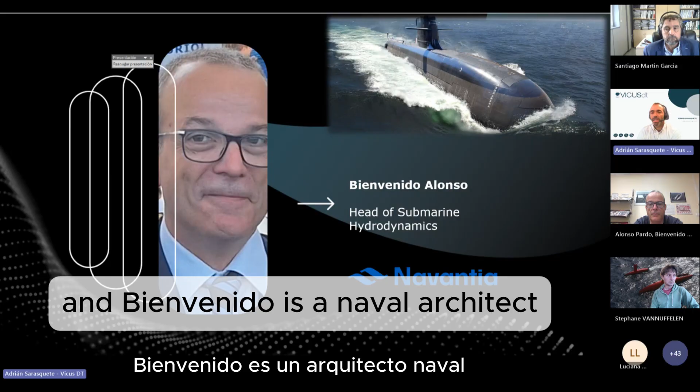So we welcome Bienvenido Alonso. He's the head of submarine hydrodynamics at Navantia. Navantia, as many of you know, is one of the leading Navy shipyards in Europe, and Bienvenido is a naval architect. He has been working on submarine hydrodynamics for 2 decades, and we are very happy that he can share some insights into the hydrodynamics of quiet submarine design today.

Then Santiago Martín is the managing director of the biggest shipyard of Armón Group, which is the biggest shipbuilding group in Spain. Santiago has accumulated several decades of experience working on silent propeller projects in their oceanographic research vessels, which are among the quietest in the world. So he will bring the shipbuilder's perspective on how to bring the scientific concepts of quiet propulsion to the slipway. Good morning, everybody.

Welcome, Santiago. And then Stéphane Vannuffelen is from EXAIL, which is one of the leading companies in unmanned vehicle design and construction for different roles. Stéphane holds an engineering degree in physics and has more than 20 years of experience in the fields of offshore and research for underwater noise, and he will also explain his experience with the EXAIL unmanned vehicles and some practical cases.

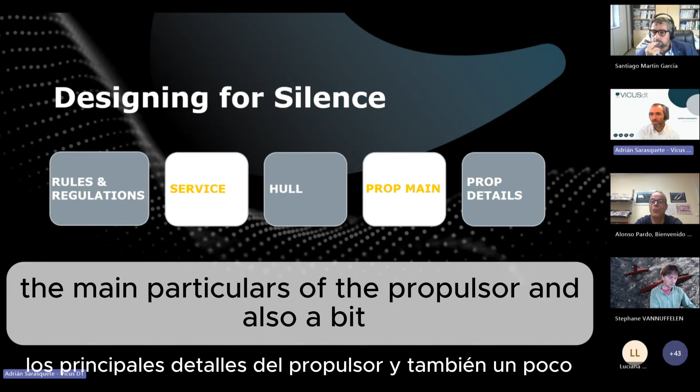Okay, that's me. Some of you already know me. I'm the managing director of VICUSdt, a ship propulsion consultancy specialized in ship propulsion and engineering. So in the first part, as I said, I will give a brief introduction on certain interesting topics, which are not purely propeller hydrodynamics, but more the connection with practical aspects of shipbuilding. There will be 5 blocks in these 15 minutes: the rules and regulations, the service and mission of the vessel and its constraints, the impact of the hull design and how it influences the propeller, the main particulars of the propulsor, and also a bit of insight into the propeller details.

We were joking yesterday that we might spend 1 hour talking about only one of these slides, because you can spend the whole day talking about the standards, or 2 weeks talking about the service conditions or hull optimization. But the idea of this block is just to give a very brief overview of several topics that will help us during the roundtable.

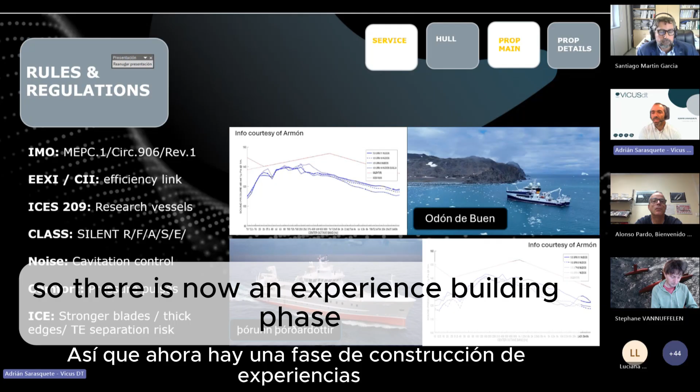Okay, so regarding the rules and regulations, just some brief notes. People are a bit scared about the upcoming IMO MEPC guidelines that were recently approved. There are some guidelines for underwater radiated noise. There is now an experience-building phase from 2024 to 2026, and maybe some mandatory limits will come after that. So we will see where this takes us. But this is a kind of warning for the market that things are also moving at the IMO level. So it's not only Navy and research vessels, but also what can become mandatory for other types of ships.

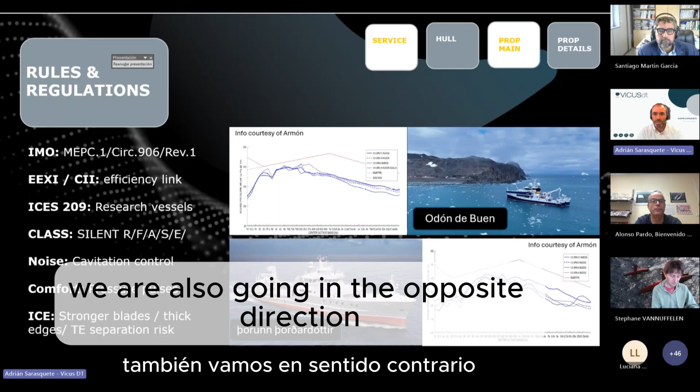The EEXI and the CII are all in place and under control, but they're also linked. According to IMO, there might be a link between them, because more efficient vessels should be quieter since they use less energy to propel through the water. But on the other hand, when we push the propeller design for efficiency, we are also going in the opposite direction compared to silent design, as we will see a bit later.

Then the ICES 209, some of you will be familiar with it, and also the class rules, the class notations for silent vessels. We talk about the underwater noise curves, like we can see here. Thanks to Armón, we have these 2 pictures of these nice ships built in Vigo, Armón shipyard, and also the curve you see there is the ICES 209 limit, which is the red curves, and below you can see the noise signature of those vessels. That is the blue curves, which have been recorded with the sonobuoys.

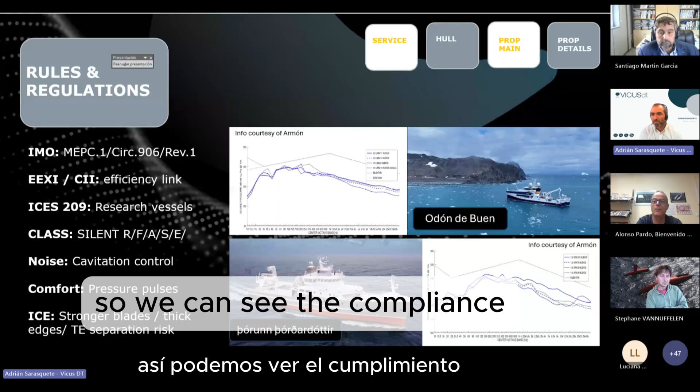So we can see the compliance, which is very important for this type of vessels, so they can accomplish this mission. So you have 2 ways of complying with the curves, either the ICES 209 or class rules, like the Silent notation by DNV or Dolphin by RINA or others.

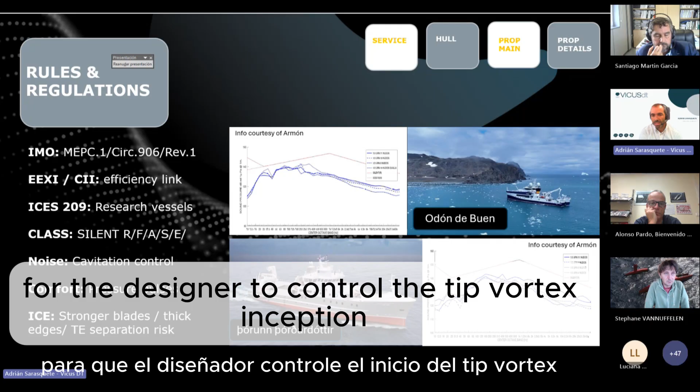Then when we talk about the underwater noise, we mostly are talking about cavitation control. So sheet cavitation, but mostly it's tip vortex what we have to control. We have to delay the tip vortex inception. And this is what we have to keep in mind when we are talking about compliance with one of these underwater rules. So very focused, for the designer, on controlling the tip vortex inception.

And then the comfort standards are somehow connected to the quiet propellers, because the pressure pulses transmitted by the propeller are also an important driver for the vibrations and noise on board. And so there is also a connection there. When a ship has to comply with the comfort standard, in the end, you have to make a silent propeller.

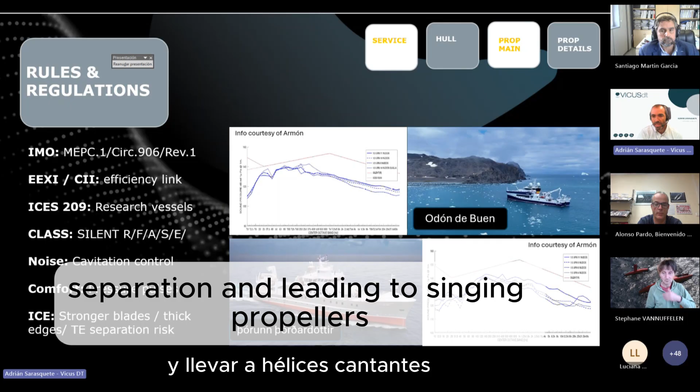And last but not least is the ice class. The ice class is affecting the thickness of the blades, and this might have an impact on trailing edge flow separation and lead to singing propellers. So we will talk a bit about that later.

Okay, next one is the service conditions. The shipyard is paid to design a vessel and build it to comply with some requirements, but the owner is sometimes requesting things which are very challenging. So they want efficiency, but they want hydroacoustic performance, and this takes us to a difficult compromise. So making a quiet propeller compared to a very efficient propeller is not always possible.

So making it quiet, complying with any of the standards we mentioned earlier, implies very often losing easily 5 to 10% efficiency, depending very much on the project. But in a challenging project, the efficiency loss can be significant, and this must be kept in mind.

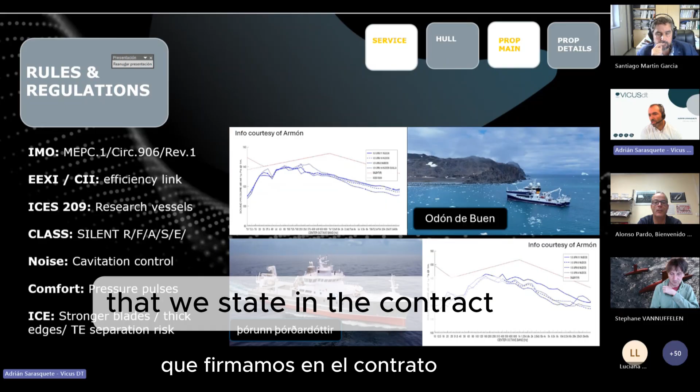When we talk about the silent speed that we state in the contract, it's important how far it is from the top speed, because we cannot make a small hull with a silent speed of 11 knots when the top speed is 12 knots. And this is because of the Froude number that you all know. This will lead to a very highly loaded propeller thrust coefficient. And this also makes the design of the propeller much more difficult.

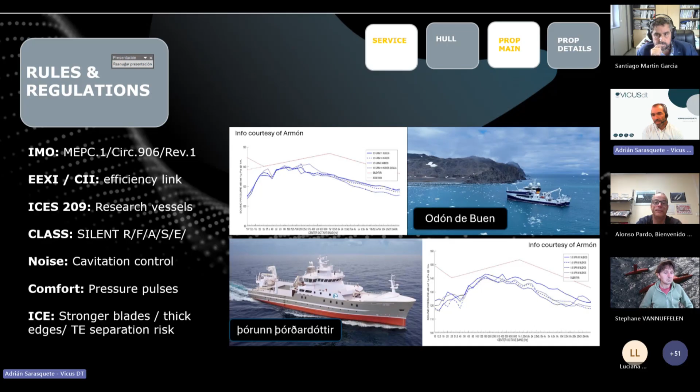So typically, small ships have a compliant silent speed in the low range, say 8, 9 knots, while bigger ships are more in the range of 10, 11 knots for the noise measurements. And when it comes to the maximum speed, it impacts the design of the propeller as well, because when my contract states that I have to comply with a top speed which is very much on the edge of the hull design, I need to squeeze my propeller to be efficient also to reach the top speed in the contract conditions. Sorry, the slide was wrong.

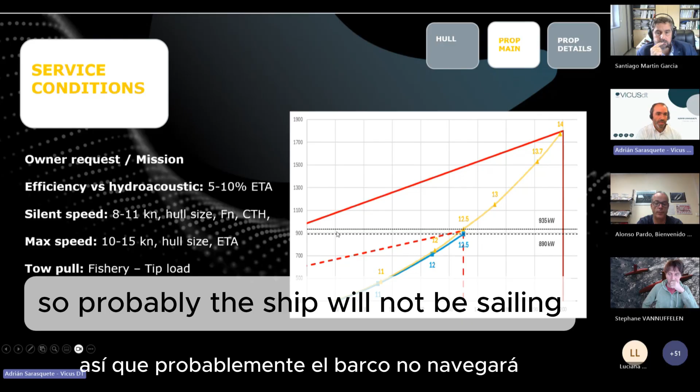This is an example, a ship designed for 12.5 knots and a ship designed for 14 knots. So probably the ship will not be sailing much faster than 12.5 or a bit more. But the difference in the efficiency of the propeller, you can see here, we have 45 kilowatts. So it's 5% efficiency, because one propeller was designed for 14 knots, while the other was designed for an engine only to reach 12.5.

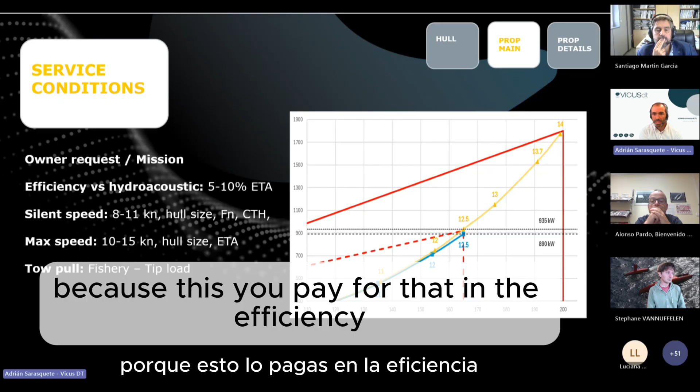So if the ship really doesn't need this extra knot, it will have a cost to keep it for the rest of the life of the ship. So it's very important. This is more a talk to the owners, not to ask for very high speeds, because you pay for that in the efficiency and also in the silent design of the propeller.

Okay, and then for the tow pull, especially for the fishery research vessels, there is also a requirement in the tow pull by towing a net or typical research net. And this also has an impact on the tip load, especially if it's a ducted propeller. So take care also with that.

Okay, going into the hull, then Santiago will talk a bit more about this, so I will go about this quick. It's obvious the resistance is not a secondary factor, but is critical, because if I lower the resistance, I reduce the thrust needed by the propeller and it makes the life of the propeller designer much easier.

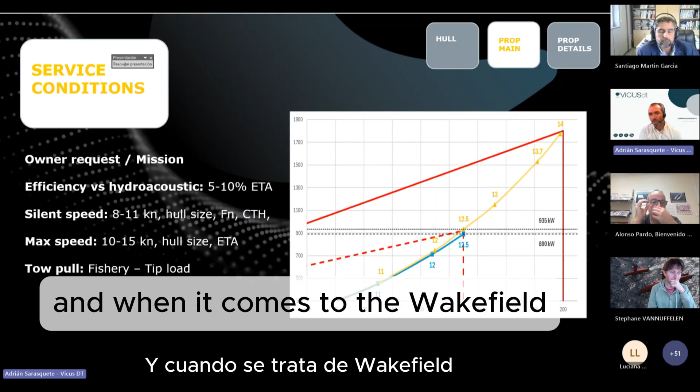Thrust deduction and wake. And when it comes to the wake field, it's obvious that going from single to twin screw also makes the life much easier for the propeller designer, and we can make a more efficient and quiet propeller. But obviously the twin screw configuration is not the cheapest. But if the project allows, or for a challenging project, when you go twin screw, it is much easier to comply with all the requirements.

Adrián, excuse me, I believe you are having problems with the slides. Yeah, sorry. Okay. Here it is.

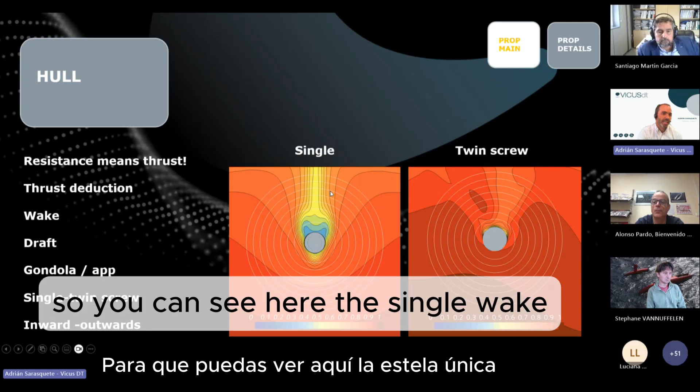Yeah, the single and the twin screw I was showing. So you can see here the single screw wake field and the twin screw wake field, where you can see here the shadows of the shaft brackets and the shadow of the shaft still having an impact, but it is way less than when you see the single screw. So this is the impact the wake has in your project.

And the same happens with the rotation of the shaft. When you go with a twin screw, ideally you should go for a rotation inwards. That's the way. So the propellers are rotating inside, so you unload the propeller. That's an easy decision and also has an impact on the load of the propeller and the cavitation performance.

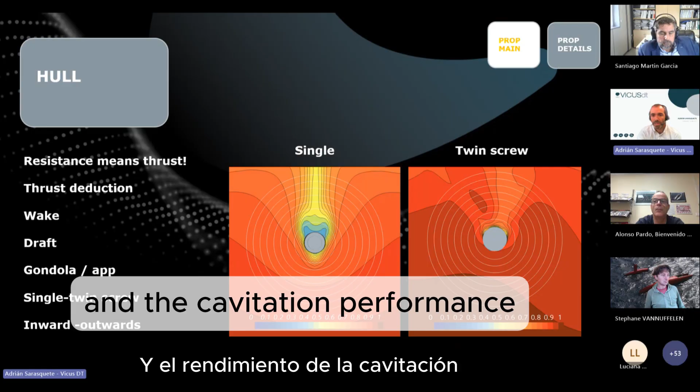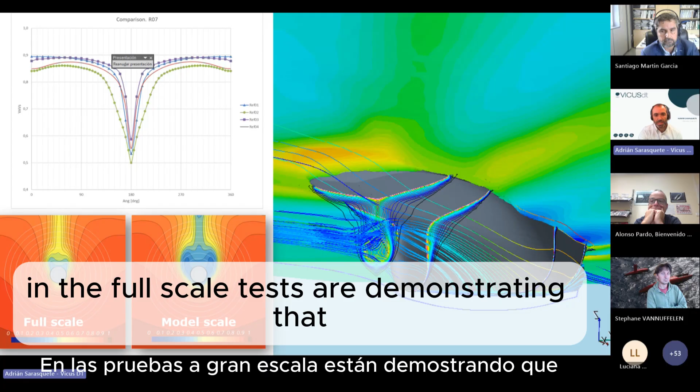Okay, just the two last ones, on the main particulars of the propeller. So now we talk about real propellers. The first decision: once you have your hull, you optimize your wake field, you optimize your appendages, the gondolas and everything. You convince the owner not to ask for a lot of thrust, a lot of speed. It's time to go for the propeller.

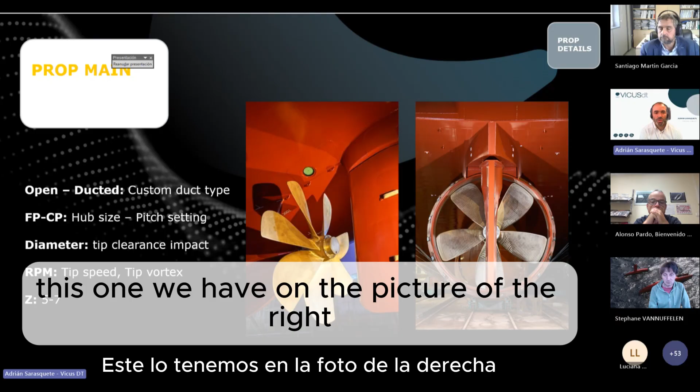And most of the configurations are open propellers for quiet ships, research vessels mainly. But there are some cases of ducted propellers, like this one we have in the picture on the right, which is an ice class ducted propeller, also compliant with the underwater noise requirements.

When you do put a nozzle, make sure you make a custom nozzle. So not the standard 37 or 19A. The standard nowadays is to make custom nozzles, typically shorter nozzles with custom profiles. The construction cost is almost the same, and the interaction with the propeller tip is much better. So this is a good step to consider.

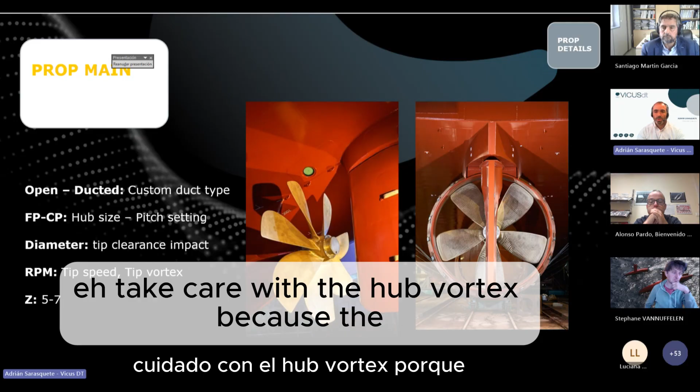For the fixed or controllable pitch, fixed pitch is the standard. And if you go for controllable pitch, which gives you also a lot of flexibility, despite it's much more expensive and not so optimal, take care with the hub vortex, because you might end up having a very strong hub vortex. And I think later on Bienvenido will mention that, because that's also another problem with the submarine vessels. When you unload the tip, the load goes to the hub. So in the CP propellers, that is more critical.

And regarding the RPM, the tip speed is the parameter to control, which typically should be between 17 and 22 meters per second at silent speed. And at top speed, you can find yourself at 25 to 28 meters per second. So you can keep these figures in mind when you are making some numbers for your project.

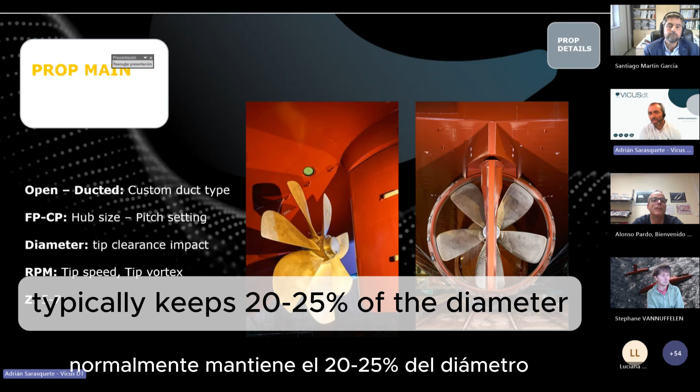And going over the tip clearance, the tip clearance is something that people typically keep at 20-25% of the diameter, but you can really go to lower figures, even 15. So it shouldn't be a problem as far as you control the tip load. So the tip clearance is not a fixed value, it depends a lot on the load on your propeller. So maybe it's better to have a larger propeller with an unloaded tip, even if you are closer to the hull. So keep that in mind as well.

And regarding the blades, 5 to 7 blades is the standard. No need to put more blades.

Okay, and then final slide, and then we go to the chat.

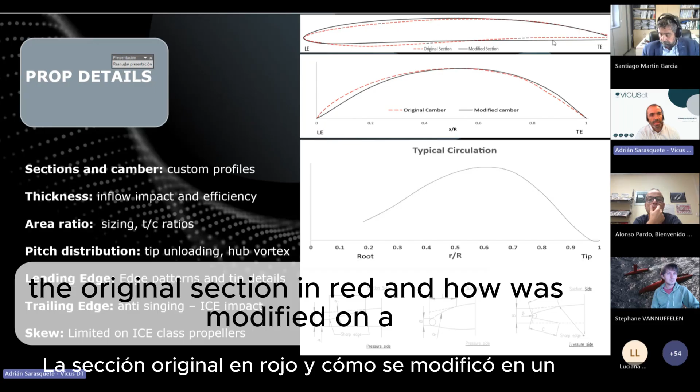Regarding the sections and camber, we can see here on the top of the slide this profile, the original section in red, and how it was modified on a silent propeller. Then the modified section, you can see the change in the sections and in the camber. Below, we can see how the camber is modified: original camber, more camber on the leading edge, and then we go to less camber in that area.

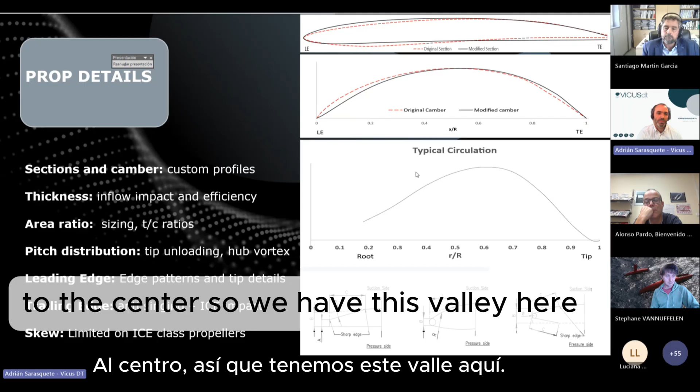So when you talk about the circulation, for those of you that don't know, the circulation is how we distribute the load radially on the propeller. This is the circulation distribution for a silent propeller. We want to shift the load from the tip, here on the right of this curve, to the center. So we have this belly here, but not put too much load on the root, because then I will make a very strong hub vortex.

So it's a trade-off. Try to go to 0 on the tip, increase the load in the middle, but not too much. So in this area you need to find a balance, a trade-off between the load you put there, but not overload the profiles too much.

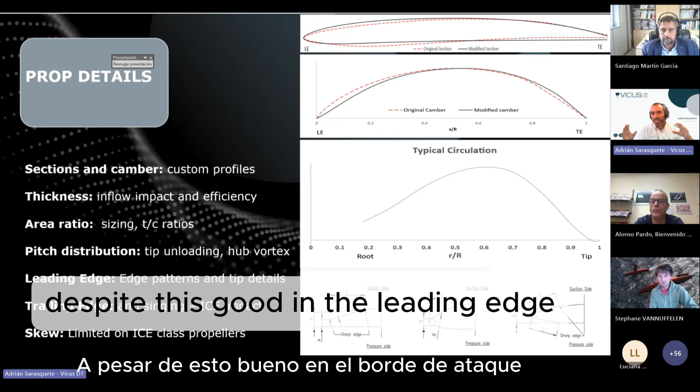And final comment is regarding the trailing edge. You remember I mentioned the ice class propeller. For the ice class propeller, you have to make thicker edges in the leading and the trailing edge. Those thicker edges, despite being good in the leading edge, in the trailing edge can be a problem because of the flow separation there, which can generate singing.

So the anti-singing edges on ice class propellers are very critical, and you have to study that part very carefully, because having a thick trailing edge can generate flow separation very easily, especially with unloaded tips. So that area, the tip with an ice class propeller, is very dangerous.

So pay attention to that when you design your propeller, because for the anti-singing edge there are different options that many of you are familiar with, like suction side only, rounded, both sides, and combinations of them. There's a lot of science behind this, and it's very tricky to tune.

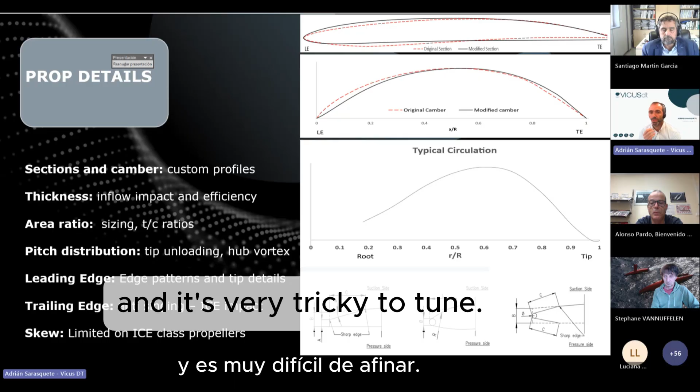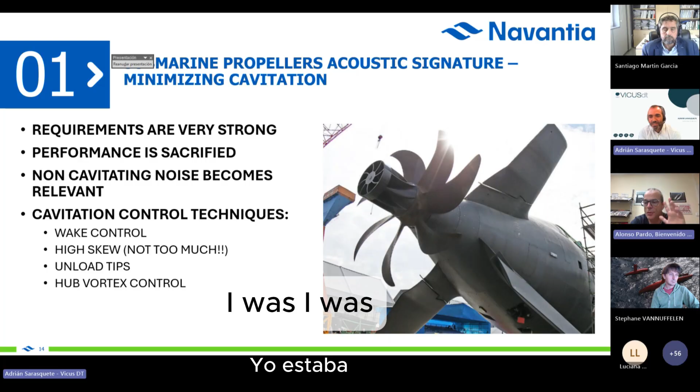Okay, so I think that's all from my side. I already exceeded the time a bit, and now it's time to go to the round table. We have a few slides that were prepared by our friends joining us on the round table. So now I will give the floor to Bienvenido, because I have some questions. Bienvenido, hello, welcome. Hello, everybody. Okay. Well, I will show you.

I want to ask you about the technologies and the state of the art in submarine propulsion design, and what technologies you think are most promising today to minimize cavitation in modern submarines? Okay. As you can imagine, the design of propellers in submarines is a very complicated thing,

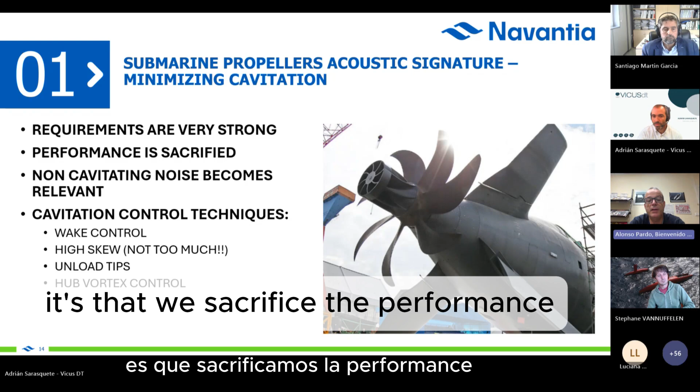because we have highly demanding requirements, acoustic signature requirements, and the usual thing with propellers in submarines is that we sacrifice the performance, trying to meet the requirements on acoustic signature. Usually in submarine propellers the cavitating noise is not very important, because what we have to do to avoid cavitation is go deeper.

Obviously, then the non-cavitating noise becomes relevant in this kind of propeller. But when we go to snorkel depth, at periscope depth, we are at depths usually found with surface ships. Then we have cavitation, and we have to design the propeller attending to several cavitation control techniques.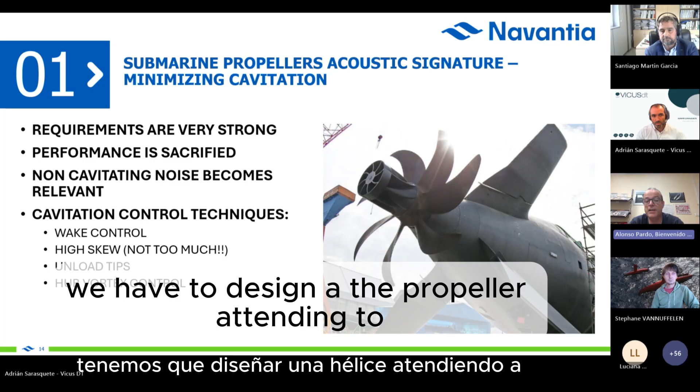Among the main control techniques, in my experience and the experience of everybody in this business, you need to have very strict wake control. Non-uniformities in the wake are the main cause of cavitation.

Then, after controlling the wake, if you have to mitigate the effects of cavitation, you can use high skew, not too much, because highly skewed propellers have additional problems for submarines. But you need to make a high skew propeller to try to mitigate the cavitation.

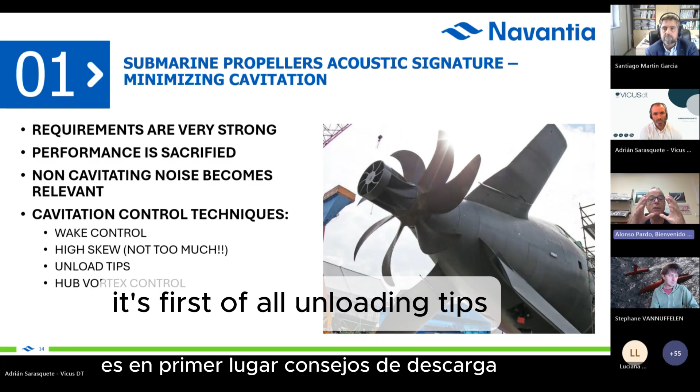And of the two main techniques to control cavitation, first of all is unloading tips. It's the main topic you have to keep in mind when you need to avoid cavitation. It means you sacrifice the performance, you sacrifice the efficiency, unloading tips, but it's the first step to avoid cavitation after wake control, you remember.

Then when you unload tips, you avoid the tip vortex cavitation, and the inception of cavitation should be by hub vortex cavitation. Then you have to,

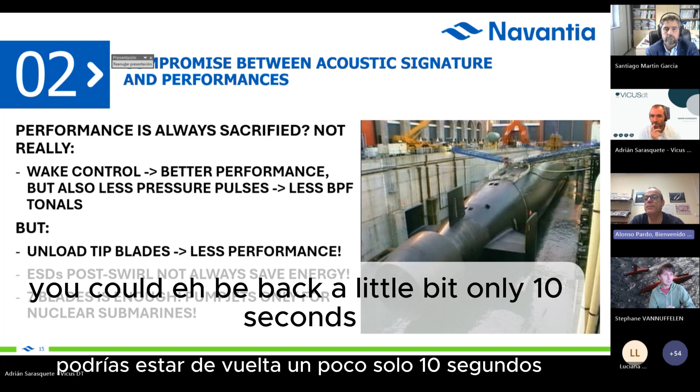Could you go back a little bit, only 10 seconds.

To control the hub vortex cavitation, that is the main problem now. If you have made the things correctly, you need to put something in the hub, like you can see in the photograph. It's not an ESD, an energy-saving device. It's a special thing to try to distort the vortex

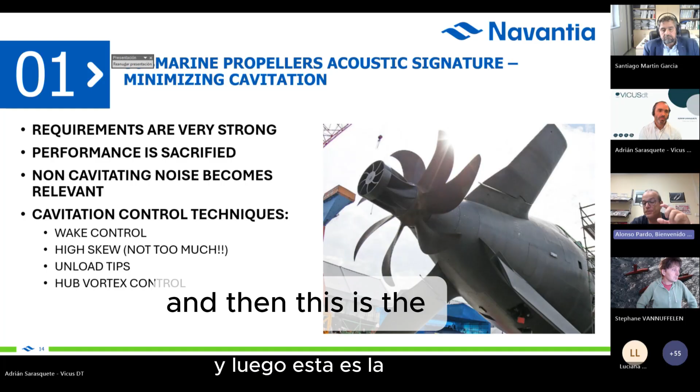produced by the roots of the blades, and try to mitigate the tendency to join the vortex of the roots in the hub. And this is the main way to try to mitigate the hub vortex. That is our main concern today.

Okay, that's an interesting device. We don't have that in the ships. We have the PBCFs, but they are working with a different idea in mind. But yeah, this device is not for saving energy. Yeah. This device increases the energy necessary to move the submarine, but a little bit, and reduces cavitation risk.

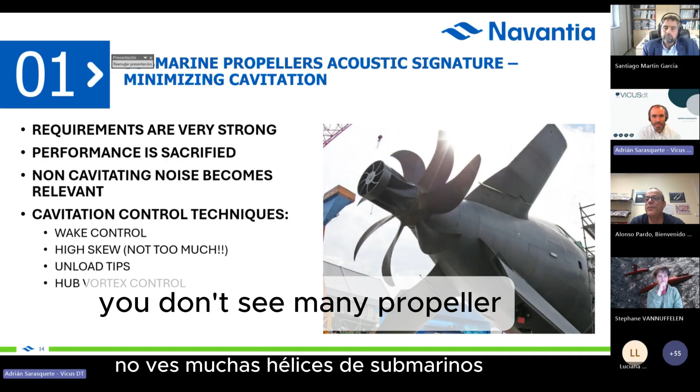Okay, interesting one to see this. You don't see many submarine propeller pictures very often. It's typically very restricted. Yeah, no, this is an internet file from a German submarine, if someone is interested. It's not the Spanish submarine, don't worry.

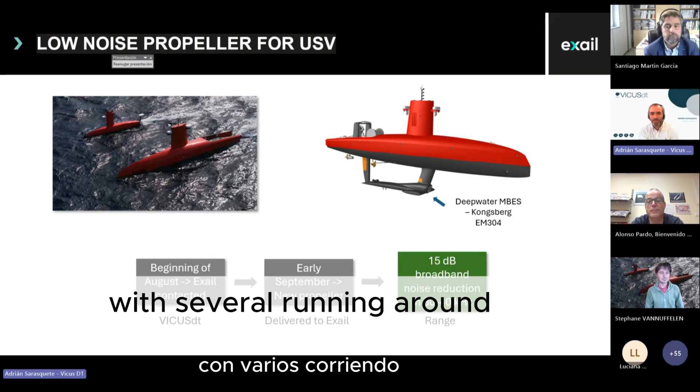Okay, thank you. I also wanted to ask Stéphane, then we will come back to the submarines, to join us and comment a bit on the unmanned surface vehicles, because I think EXAIL has an interesting product now on the market with several running around. Drones are in fashion now because of the extensive use in the world, but I believe there is a promising future now that a lot of companies are developing this type of solutions, and I believe EXAIL has a good one.

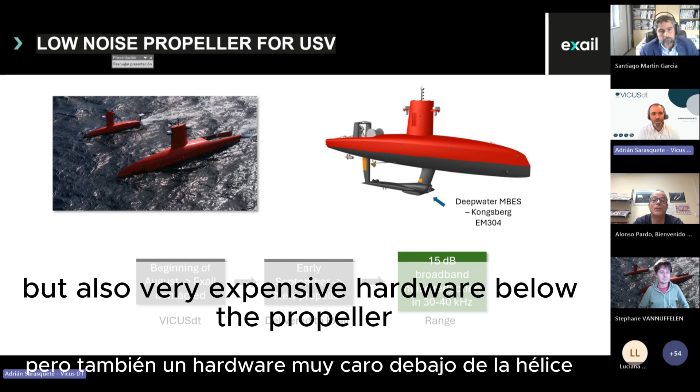So, Stéphane, what are the biggest challenges when integrating a small propeller on a small vehicle with a high power density, where you still need efficiency and you need to be very silent, because you have a big gondola, but also very expensive hardware below the propeller, as we can see in the picture, that is obviously affected by the propeller.

Thanks so much, Adrián, for giving me the opportunity to provide our perspective regarding low noise propellers and the impact of the acoustic signature on USV operations. I work for EXAIL, we're a French company, and we are manufacturing the DriX USV family that you can see on the picture. We have the DriX H8, 8 meters version, and the DriX O16. And in August, we started a collaboration with Adrián and his team regarding optimizing the propeller design for the DriX O16.

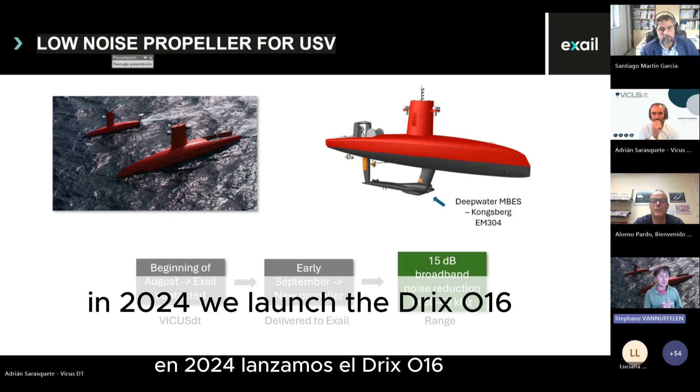These USVs are mostly designed for hydrographic applications, seabed mapping. And in 2024, we launched the DriX O16, that you can see a picture of currently. This DriX O16 is equipped with a full ocean depth multibeam echosounder from Kongsberg, the EM304. This multibeam echosounder is designed to do seabed mapping to water depths in the range of 5,000 to 6,000 meters. It's a fairly big antenna, installed in a gondola below the DriX Ocean. The antenna is in the range of 2 meters wide and 4 meters long.

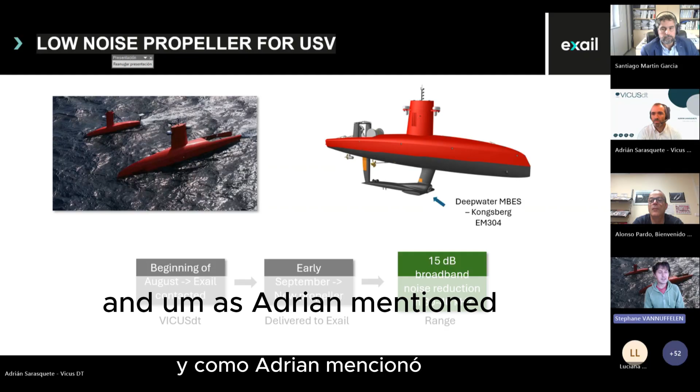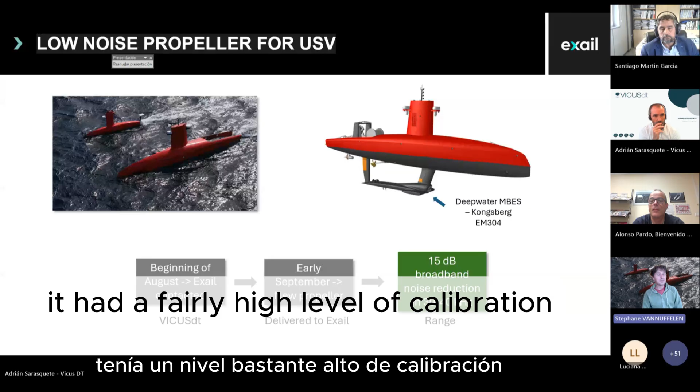And as Adrián mentioned, since it's a multibeam echosounder, the signal-to-noise ratio is super important in terms of maximizing the operating envelope of the multibeam. Any noise received by the receiving part of the echosounder will degrade the performance. So we started the integration of the EM304 in July, and we realized that the three-blade off-the-shelf propeller that we were using at that time was too noisy. It had a fairly high level of cavitation that was impacting the multibeam performance and maximum depth range.

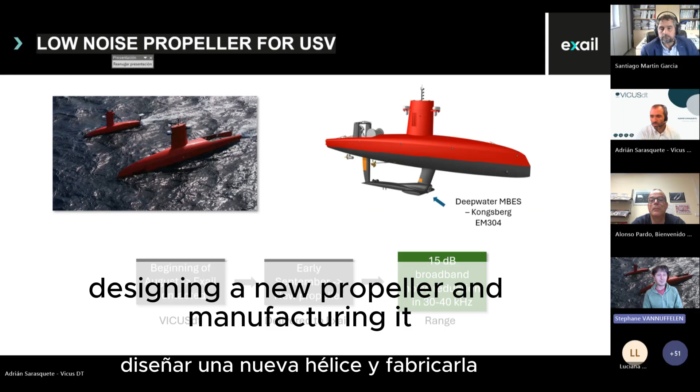So following this, we contacted VICUSdt at the beginning of August to start a study around a new design, knowing that we had a very strict deadline because the vessel was leaving Marseille to go to Lisbon at the beginning of September to participate in REPMUS. So it was a very tight deadline in terms of designing a new propeller and manufacturing it. And in the end, VICUSdt delivered, and it was a very good experience from our standpoint. VICUSdt was really on time in delivering the propeller. It was fitted on the vessel 3 days before its departure.

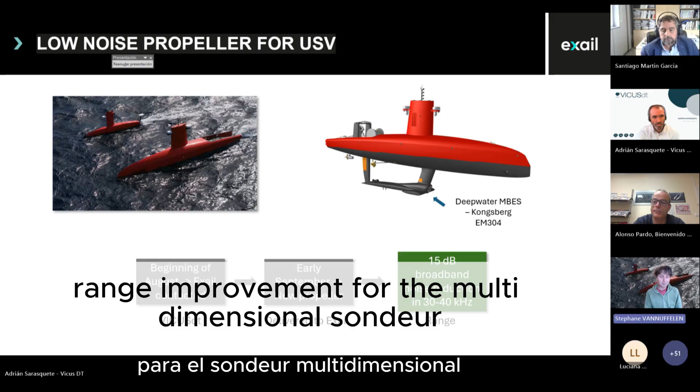So once again, thanks to the entire team at VICUSdt for their dedication. They've really been part of this success, European success, as part of the REPMUS operation.

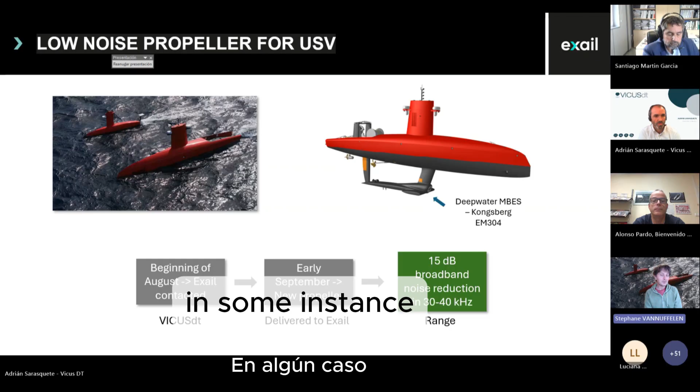In some instances, the DriX Ocean was operating in sea state 5. We had wave heights in the range of 5 to 6 meters while still doing seabed mapping operations. It was the first time a USV demonstrated deep water seabed mapping capability in such a harsh environment.

Thanks so much. Okay, very interesting.

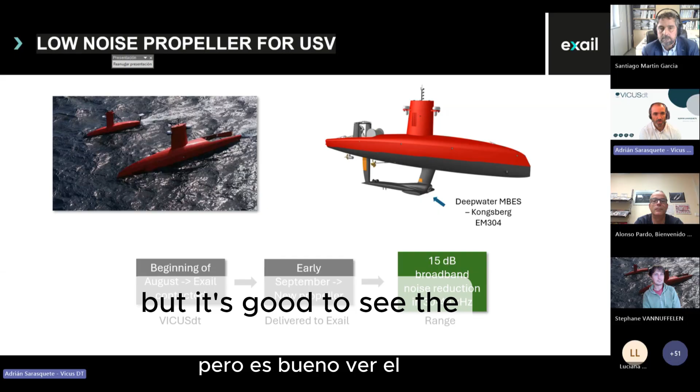We believe for this type of unit, there are a lot of constraints in the size of the propeller, because if you make it bigger, you are getting closer to the gondola. Still, it's a very interesting concept, but the load on the propeller, in terms of kilowatts per square meter, was quite high compared to the normal standard. So it was indeed a challenging project, but it's good to see there will be a lot of opportunities for unmanned vehicles designed for this type of role or military roles.

Okay, thanks, Stéphane. I want to ask Santiago about the hull, about the challenges because of the integration with the gondolas. In our experience, the gondola can have a huge impact on the resistance, but also affects the wake field. Santiago, what are the developments you carried out in the last 15 years?

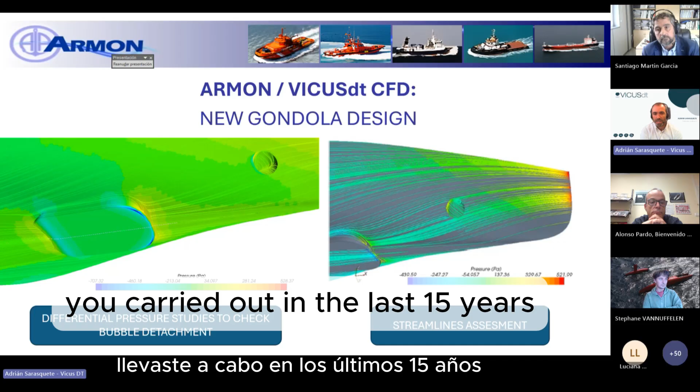Hello, everybody. Thank you very much, Adrián, for inviting me to talk about these extremely interesting things.

Just for you to have a quick idea of our long road with VICUSdt, we have been building research vessels with VICUSdt for the last 15 years, more than 12 units, most of them complying with ICES criteria and with very restricted URN, underwater radiated noise signature.

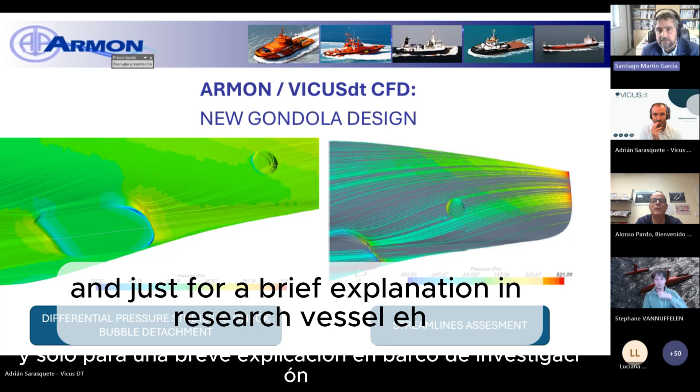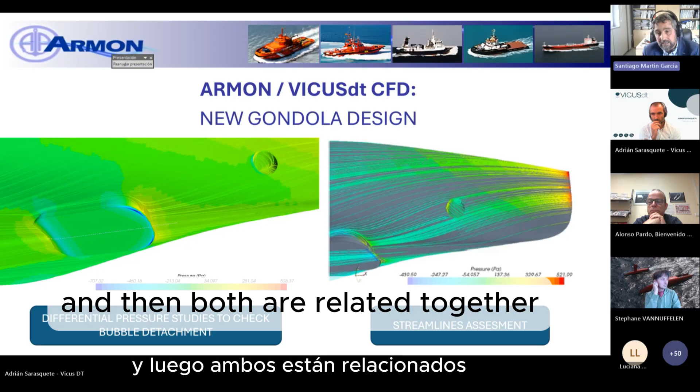For a research vessel, the most important thing, the presentation card let's say, is the ability to do bottom data acquisition or fish stock assessment. For both, the ship needs to be completely quiet. There are two killers for the multi-beam transducers: first is the noise created by the ship, and second is the bubbles. Both are related together, and both are very related to the propeller design.

First we had to study how to define the forward body of the ship without bulbs, with a straight vertical forward body. Most critical was the interface between the hull and the seawater, where we have the greatest creation of bubbles, which we studied through streamline assessment. That's something we did with VICUSdt from the very beginning.

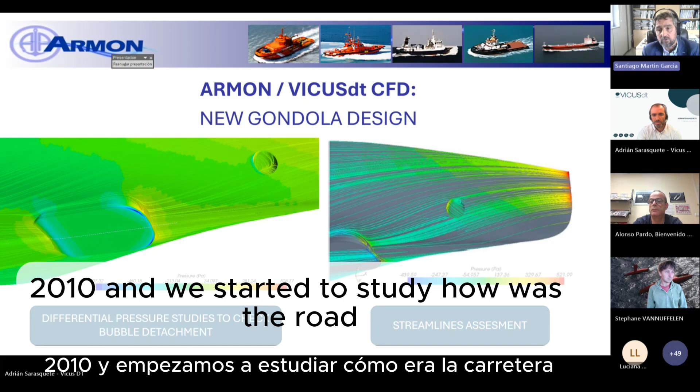In 2010, we started to study the path of these bubbles into the gondola, because if you remember, the beginning of gondola design had the gondolas very far away from the hull. This created magnificent performance in terms of acoustics, but it also created big hull resistance, increasing fuel consumption and having a big impact on the draft of the ship.

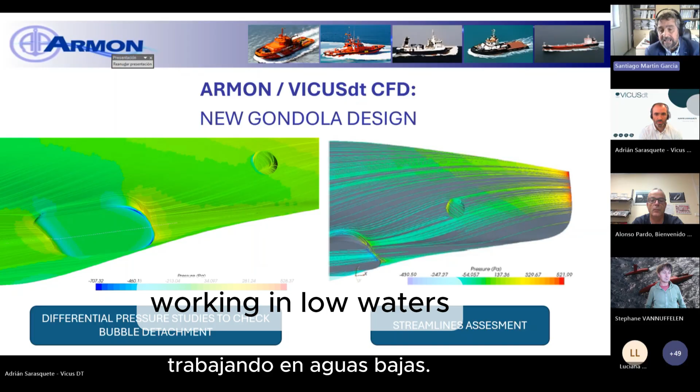So we had problems, for example, working in low waters, and it was also affecting the steering of the ship a lot. At that point, we decided to create something much more flush to the ship, trying to reduce the noise coming from the propeller into the gondola. That's why we created this kind of design, much more integrated into the ship bottom.

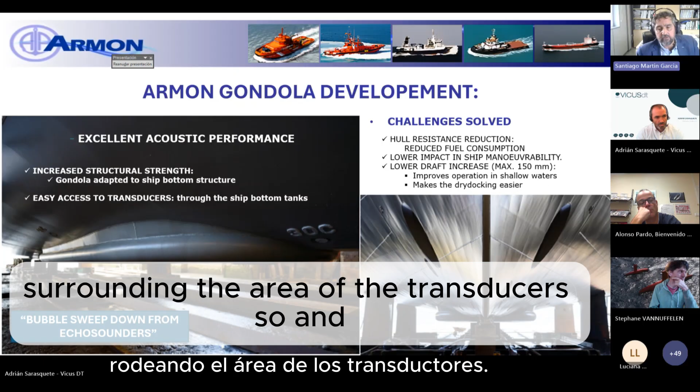It created a path for the possible bubbles created at that interface, surrounding the area of the transducers. This has been a big improvement, not just for the ship from the acoustic point of view, but also for the operation of the ship. Step by step, we were changing and modifying the design to optimize all the different necessities we had. So that's regarding the gondola.

Then regarding the propeller, the most important thing, as Bienvenido said, unfortunately in our case we cannot go deeper. Surface ships, we would like to go deeper, but that's not a possibility. Most of the time we are confined by the maximum draft of the ship because they are working in shallow water.

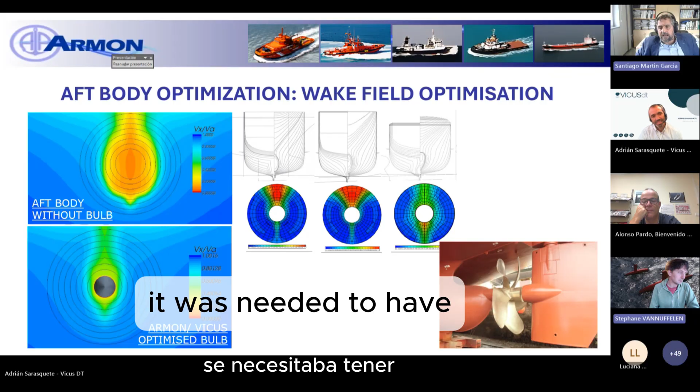So it was needed to have a big distance or clearance between the tip of the blade and the hull form. With that constriction, the first thing was to try to improve the wake field. It was a surprise for us, the big improvement we got when we had two shaft lines instead of one, mainly because of the nice wake field we were getting.

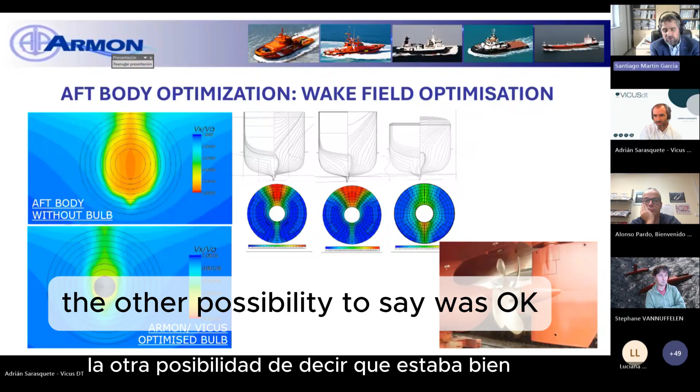So the other possibility was, the bulb that we were taking out from the forward, we decided to implement it in the aft. That was the way of having a nice and homogeneous flow of water into the propeller. So once we got a nice wake field, the second step was, of course, to reduce the RPMs.

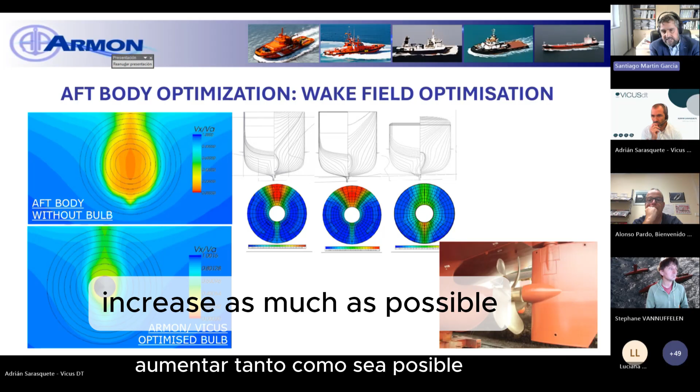The diesel electric mode of the ship was allowing us to work at very low RPMs, increase as much as possible the diameter of the blade, and then reduce the kilowatts per square meter in the propeller. Mainly, the big killer of this propeller was the tip vortex.

And for the tip vortex, we have been doing big improvements, mainly with VICUSdt, but also with DNV, with the tip vortex index they are working with. Both together, we have created propellers with very low noise, but also trying to increase efficiency as much as possible.

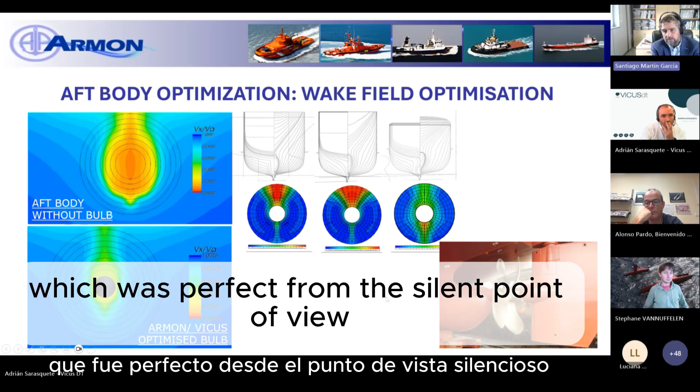But as you have been saying, the ice class, for example, or increasing the number of blades, as with Tom Crean where we were building a ship with 7 blades, which was perfect from the silent point of view, but it was reducing the efficiency of the propeller. So it's always a big compromise.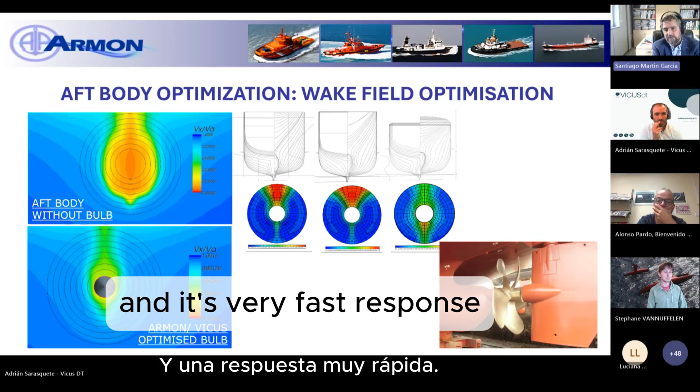And then a good result we are having also is the bulbous rudder, which is reducing the pressure created in the aft of the propeller. So at the end of the day, step by step, we have been doing new designs and small developments using a perfect tool, which is CFD, giving us big flexibility and very fast response compared to the towing tank. It's perfect to compare and optimize small things one by one. In this road, we have been working together with VICUSdt, I believe, successfully.

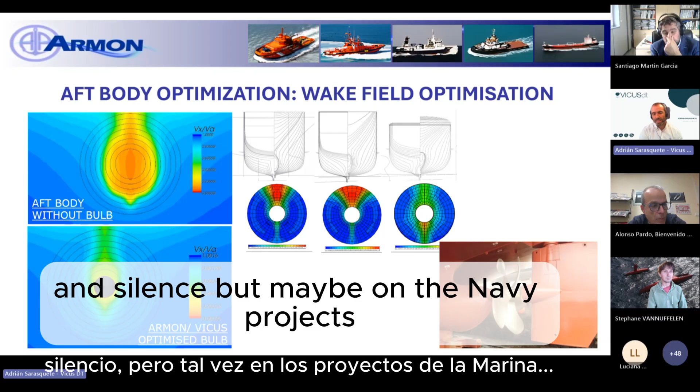Okay, Santiago, thank you. I have a question that is open for all of you, maybe Bienvenido, you can comment, because I'm curious about the trade-off. Santiago already mentioned the trade-off between propeller performance and silence, but maybe on Navy projects, fuel performance is not so critical, and the pure interest is going into the noise. But I think for the endurance of the project or the ship, it also plays a role. Do you have any comment about that?

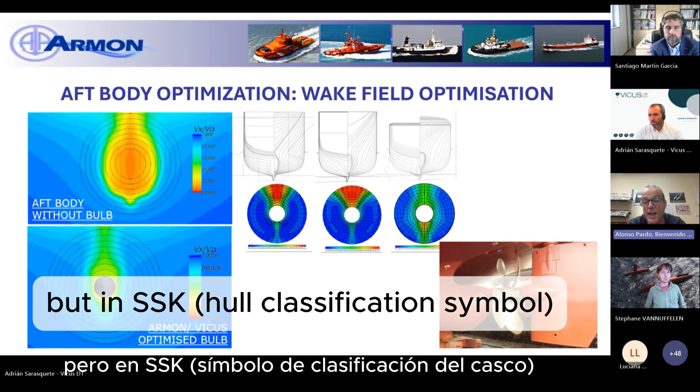Yeah, the real difficulty of this is the compromise solution, as Santiago said, because performance efficiency is sacrificed, but not always, because you don't always have a nuclear submarine. When you have a nuclear submarine, you sacrifice efficiency because you have a lot of energy. But in an SSK, an AIP submarine, or a diesel electric submarine, the kilowatt is very expensive, and you need all the kilowatts possible. Then the performance is not so easy to sacrifice. You have to negotiate and be careful with these kinds of things. I completely agree, at the end it's a compromise solution, as usual.

Okay, and you, Stefan, what is the trend with the endurance? Because I was surprised when you mentioned that the Drix sailed from Marseille to Portugal. It was a non-stop trip, no? For how long, or what is the range? How is the compromise with the acoustic performance?

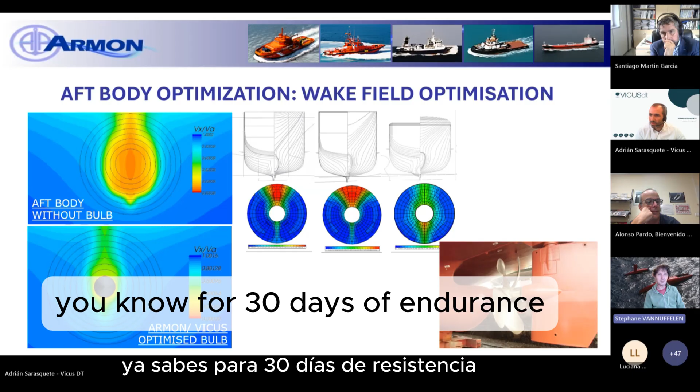It was a non-stop trip, and the Drix Ocean is designed for 30 days of endurance. So we're talking about fairly long endurance, and energy efficiency is super critical. It's the same as Alonso said: for us, kilowatt is super expensive in terms of space and volume, and it's always a fight toward being as efficient as possible. On the other end, we think it also depends on the customer in terms of efficiency. For some of them, they will be more interested in having a silent propeller and losing a little efficiency, and others might be more interested in the endurance part.

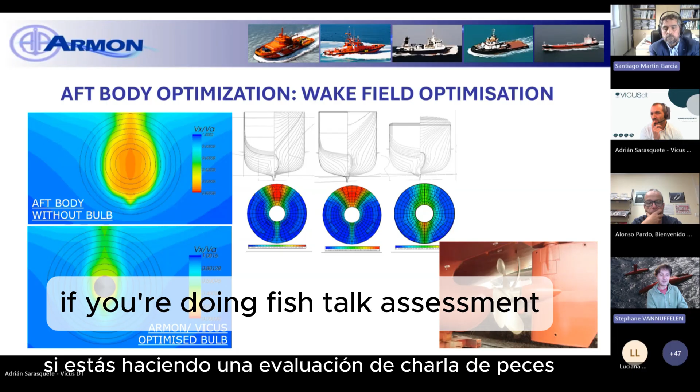For example, if you are doing shallow water seabed mapping, the signal-to-noise ratio is less of an issue. If you're doing fish stock assessment, the noise can really be something very significant, and you might be able to compromise on the endurance. So we don't think it's going to be one solution fit for every customer, but more about having different solutions in terms of propulsion depending on the application and the client.

Okay, and the last one is for Santiago, about how do you see the trends for the future? Do you detect what the customers, authorities, or your clients are asking for? I'm talking about non-research vessels, more about normal customers concerned about underwater noise from the propulsion or in general from the ship.

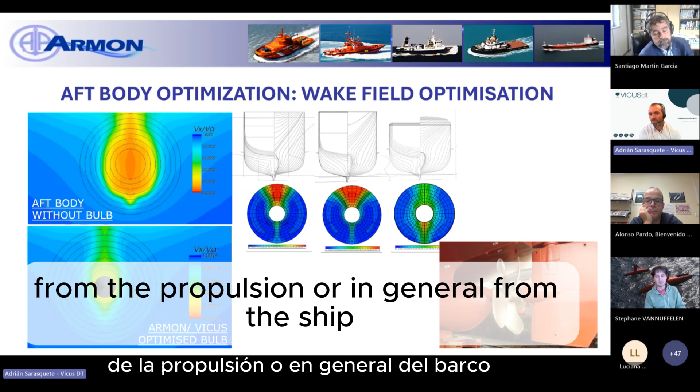Of course, the number one in this is research vessels, but there seems to be a new trend about noise, mainly in harbor and coastal areas. So most probably we will have some new rules in the near future.

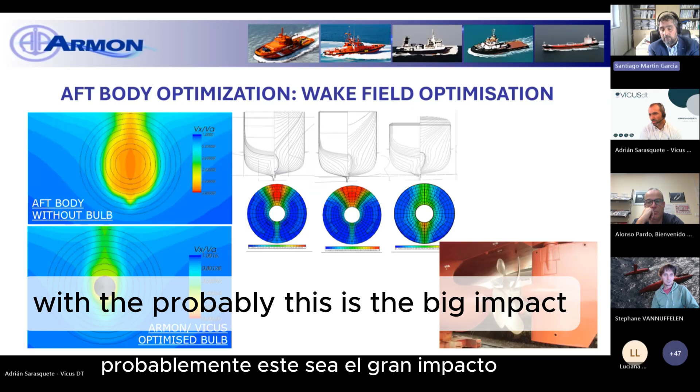I believe the big trend with research vessels will be the use of AUVs. That will allow the ship most probably to work at lower speeds, which will be very beneficial from the low noise, from the URN point of view, the noise radiated underwater, and to be working in parallel with many AUVs alongside the research vessel.

Probably this is the big impact, but what I always say is that the first thing we ask when we start designing a ship is what the profile is. The profile of the ship is very important. We know the power curve is very flat in this kind of ship up to 10, 11 knots, and everybody needs to develop data acquisition at speeds below 10 knots.

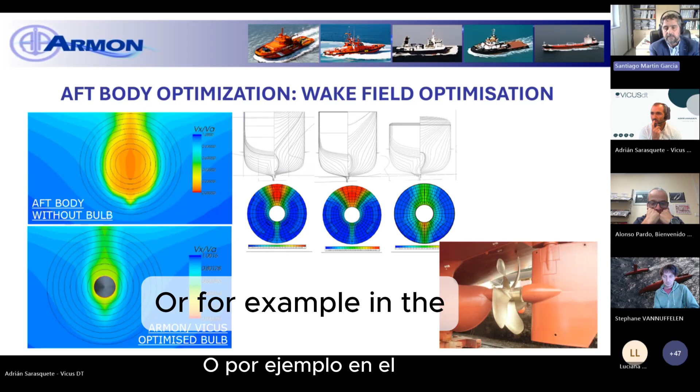That means the problem starts when they want to sail up to 15 knots, for example. This is the case in fish research vessels too, where the big problem is when they want a big pull, and then you need to install special nozzles, which we have been designing together with you.

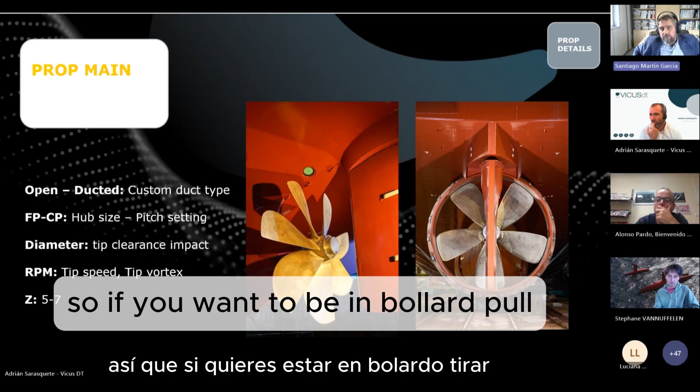So you need to start with the profile, and if you have different profiles, then you need to talk about hybrid solutions, not only in propulsion, so not only diesel electrics, PTOs, PTIs, but also the possibility of working with different propellers in different situations. If you want more pull, it's clear azimuth thrusters with nozzles is the best option, but not for data acquisition. Probably we will find a way to have hybrid solutions to get better performance in each different operation of the ship.

Okay, I think it went quick, we ran out of time. I don't know if Bienvenido, Stéphane, or even you, Santiago, want to make any last comment, and then we'll leave some room for the audience to ask questions. I hope they have a lot of questions, and we will be happy to answer. But first, Santi, Stéphane, Bienvenido, do you have any final comment?

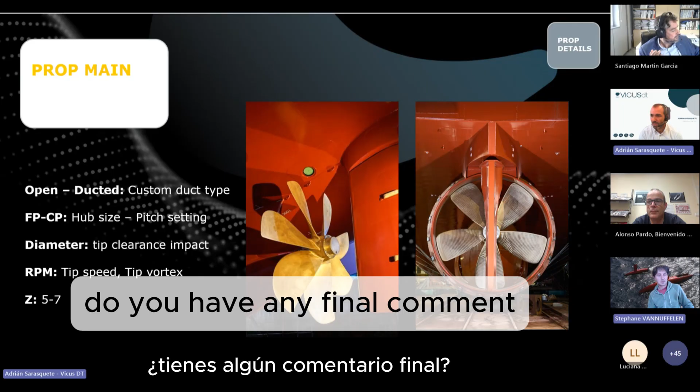Final comment for me is, once again, this is a super important topic for us, and beyond the pure civil application, we also see a lot of potential for more military-driven applications, where noise is also a super important parameter. So our collaboration with VICUSdt is a beginning, and whether it's for DriX O16 or the H8, we hope to have a long-term technical partnership to optimize parameters that are absolutely essential to the overall performance of our vessels.

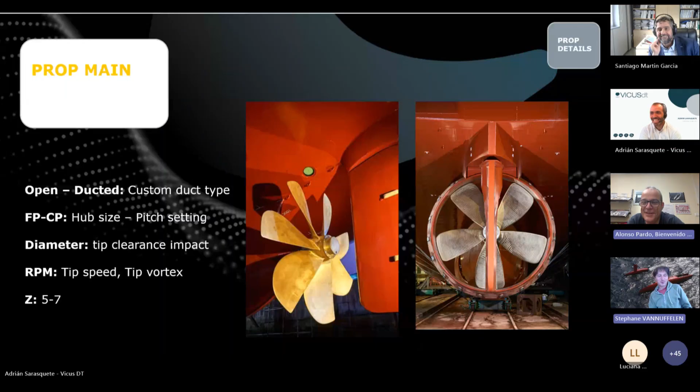Okay, yeah, from you, maybe you can sell Santiago one of the drones. Hopefully, yes, for sure it would be a cheap solution. Yes. We're making a special this week, if you buy 10 you get one for free. Perfect, perfect, good to know.

From my side, only to say thank you to everybody for hearing my dissertation, and only to remind everybody that the secret is to adapt to the new things that come to your office, in propellers, hydrodynamics, or whatever you do. It's to adapt to new things. The rest is study and survive. Thank you so much, everybody. Okay, thank you, Bienvenido.

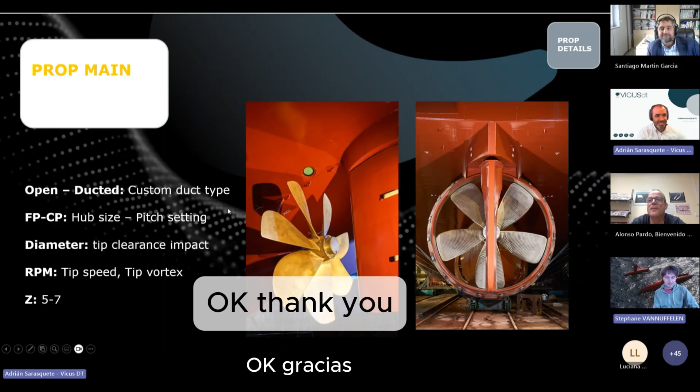Okay, so let's see if there are some questions from the audience. Feel free to ask anything about the presentation or related to underwater noise from propulsion.

Okay, we have a question: for the possibility of composite propellers, have you looked at that, and are the advantages significant enough to look at further? That's from Philip Jeffers. Okay, Philip, thank you.

Yeah, with our experience with composite propellers, not really carbon fiber, when I mention composite I mean everything that is not, let's say, metal. We have had some experience with composites, machined or 3D printed propellers, but with low power density. We found no issues with the finishing, which is normally very good, and I think they are perfectly fitted for the purpose.

But we found if you want to make it strong enough, it's not a cheap solution. But for me, it looks promising, especially for a small application. I don't know if Stéphane, you have any comment about that, the possibility of composite propellers?